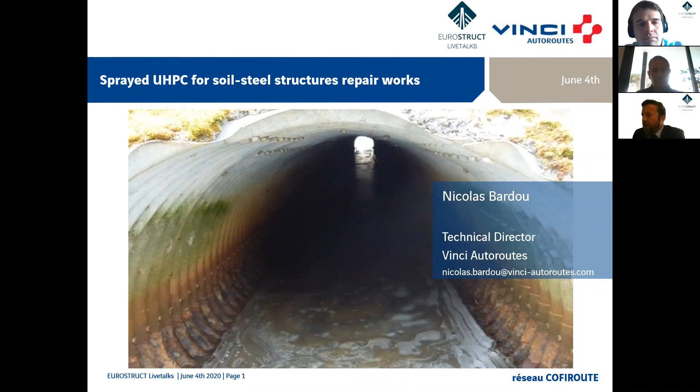I will share with you some recent experiences we have had in Vinci Autoroutes regarding what kind of innovative system we implement in order to solve a really serious problem we face in one kind of bridge we have to deal with, which is the soil-steel structure. Before entering into this subject, I will give you a little introduction regarding France and regarding Vinci.

France has more than 1 million kilometers of roads, including 20,000 kilometers of highways. Half of these highways are granted to private operators, who have financed, designed, built, operated, and maintained the highways network. The first concession contract dates back to the development of the first interurban highways in France, in the late 50s, early 60s.

Vinci Autoroutes is the leading European motorway concessionaire, operating half of the French concession network, more than 4,400 kilometers of motorways. As such, Vinci Autoroutes manages over 6,000 motorway bridges, including nearly 250 viaducts.

Vinci Autoroutes operates through 3 main companies, as you can see on this map. The biggest one is ASF in the south. In the Riviera, there is Escota, and Cofiroute operates the network near Paris.

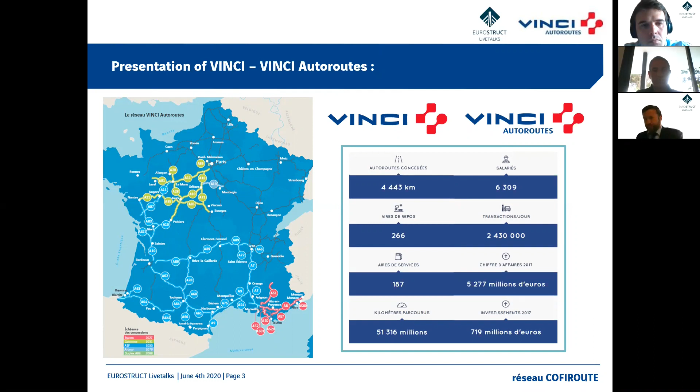Regarding this first context I explained, and to cope with the urgent need for new infrastructures in France, many innovative techniques have been implemented on the French national road network, with the search for economic optimization and speed of design and construction in the background.

And this is how the steel culvert was born. But what is a steel culvert? This is a steel culvert. It's a composite structure consisting of a flexible metal structure made of corrugated steel, assembled by bolting, which is embedded in a compacted embankment. It can be used as a hydraulic structure in drainage systems to restore waterways, or as a dry structure to restore roads or agricultural traffic on fauna paths.

Culverts are recognized as bridges for diameters exceeding 2 meters according to French standard, and some of them have an opening greater than 6 meters. Their use became widespread because this type of structure was simple, quick, and inexpensive to build, while offering longitudinal flexibility to tolerate profile misalignment and having a good ability to carry large loads, which is really important. These structures flourished in France from the 70s to the middle of the 80s.

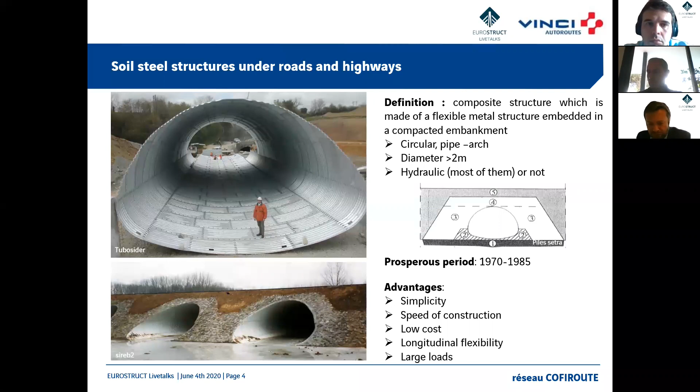But this heritage is confronting serious problems. Steel culverts were generally located in unfavorable environments with the presence of water or aggressive soils, with the transport of solid elements, which cause degradation of the culvert at the level of its walls, in the tidal area, and of its raft. Corrosion can also be very important on the backfill side, and therefore not detectable during visual inspection. The infiltration of water, loaded with de-icing salt for example, through the embankment from the platform is also a factor accelerating corrosion. Overall, the national heritage of metal culverts is aging.

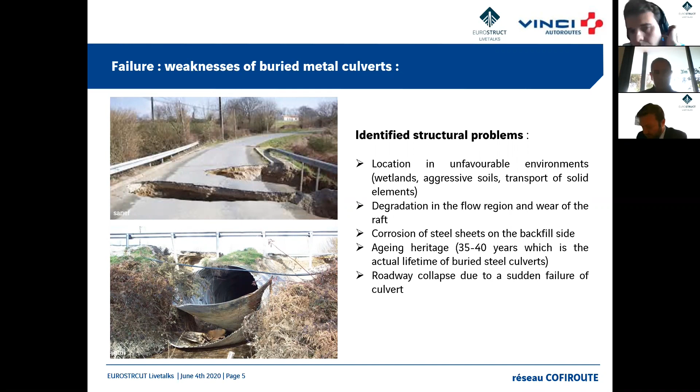Many of them are approaching 35 to 40 years, which is their actual lifetime according to a survey of managers of the national road networks. For example, some manufacturer catalogs expect 25 years as a lifetime for this kind of bridge. Steel culverts are part of the sensitive bridge families, identified as having a risk of sudden failure given their design and their size.

At the French national level, we estimate about 3,000 buried steel culverts, and one third of them are in the Vinci Autoroute network.

So now I will give you some information regarding the way that Cofiroute deals with this kind of problem. We have, for now, a focus on one of the 3 Vinci Autoroute networks, and this is near Paris, with a lot of de-icing salt.

We decided at the end of the 1990s, following an alarming diagnosis, that our program was to complete the total replacement of all structures. In this network we have about 120 culverts. We did a multi-criteria analysis to assess the disorder and prioritize the action. To date, more than 50 culverts have been replaced.

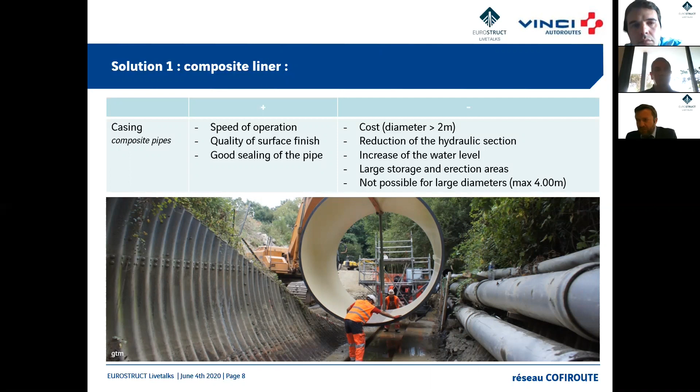The second methodology used in this repair of metal culvert is reinforced concrete. This technique is more mastered and simple to justify by calculation. It can repair culverts of any diameter. The typical wall thickness is 200 millimeters, and therefore it reduces the hydraulic section, but requires less development in the downstream and upstream areas.

However, the on-site works are substantial. Reinforcement, formwork, and concreting works lead to a long planning, often incompatible with the allocated period of intervention. To reduce the duration of work, it's possible to provide more formwork to improve the construction cycle, but these pieces of equipment are very expensive and difficult to amortize on relatively short culvert lengths. On average, our culverts are a few tens of meters in length. At last, the management of risk associated with flooding events is very random.

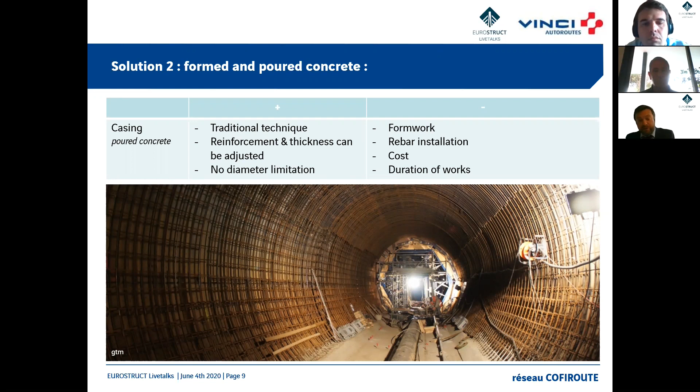The third repair method, classic repair method, is the implementation of dry shotcrete. This technique offers the advantage that it does not require the use of formworks and can accommodate local deformation at the culvert, in particular the inverted profile. However, it requires the installation of reinforcement beforehand and generates a large volume of waste due to rebound of aggregate against the steel sheet, up to more than 50% loss. That material must be disposed of in landfills, which is also a cost, and the work has a significant environmental impact. You can imagine this kind of work in a hydraulic section.

So a new solution appeared really recently, less than 1 year ago. This is the UHPC, the sprayed UHPC. This new solution had been developed very recently in France by two French companies, Lafarge and Freyssinet, which is one of the Vinci companies. This is extending the family of cast UHPC, with exceptional strength and durability. The innovation lies in the high thixotropy of the material.

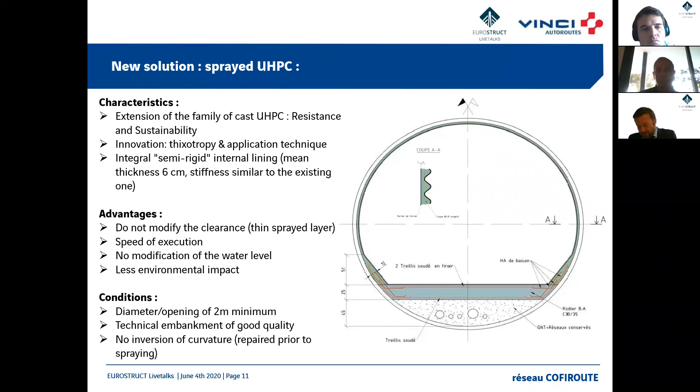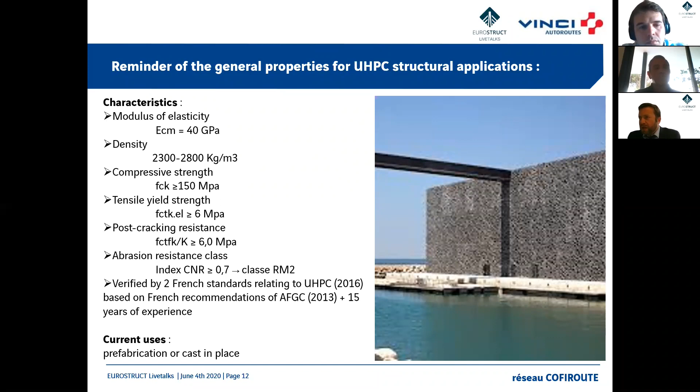So I made this presentation not regarding UHPC itself, but the idea of this innovation was to fit all the UHPC structural characteristics. I don't know if this presentation will be available on EUROSTRUCT, but you can have the reminder of the main properties of UHPC.

So what is the concept of this innovation? The main innovation is based on the thixotropic behavior of the sprayed UHPC, but also on the implementation process: mixing, pumping, and spraying. On the one hand, the rheology has been engineered so that the layer of UHPC does not sag when sprayed on the wall. No stiffening admixture is needed, which makes the solution robust.

On the other hand, specific equipment has been developed to mix, pump, and spray this highly thixotropic material, whose mechanical properties are enhanced by the spraying process, in particular the compression strength. There is low air content. The concept is to reinforce works mechanically as a composite, using the interaction between the soil and the UHPC structure. This is not, as in the traditional technique, a replacement. We take advantage of the soil structure solution.

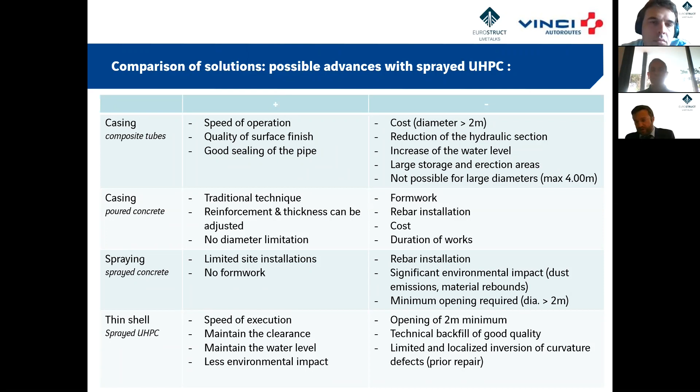So the development of this process followed the following path. The first path, it was necessary to work on the formulation of the material: rheology, adhesion, mechanical performances, as well as the development of the specific method of equipment for mixing, pumping, and spraying the material, while controlling the fiber orientation and the percentage of loss. That was maybe the main challenge.

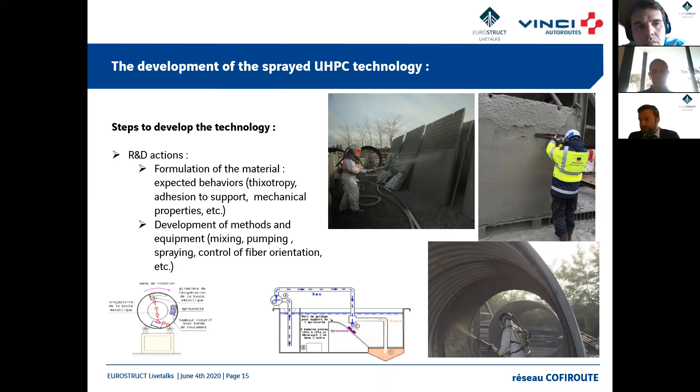The second path was laboratory tests to characterize the material according to the French standard for cast UHPC: compression, density, strength. I guess there is people in the audience from the Université Gustave Eiffel, it was IFSTTAR, this French National Laboratory, that accompanied this process of design. The purpose was to confirm that the material can be classified as a UHPC for structural application.

The third part was the numerical models. Three numerical models were developed in order to perform calculations according to Eurocodes. The first model was a simplified approach for pre-design, the second was a linear approach, and the third one was a non-linear approach with soil springs and explicit soil modeling.

The following path was that the modeling had to be validated by full-scale tests. A new steel pipe reinforced with sprayed UHPC had been loaded to failure. At last the technology was implemented on an experimental structure, a dry culvert of about 20 meters length was applied.

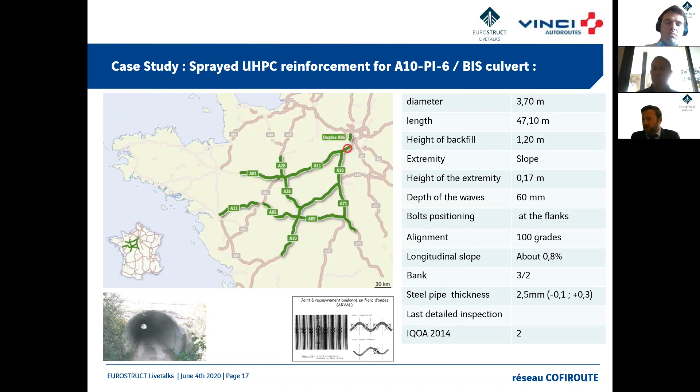So the main steps of this process were, first, the site investigation and studies. The soil investigation was really important for this concept, and all the calculations were also really important. We can verify all the calculation hypotheses regarding the soil investigation results.

The second step was the works: casting of the raft in reinforced concrete with a flat surface for the traffic, cleaning and preparation of the surface by light abrasive blasting, and construction of the UHPC shell with the production of 6 rings a day.

And all this work was controlled by my services, and we also gave a mission to a French national agency to help us lead this process. We also decided to monitor the deformation of this bridge for 10 years.

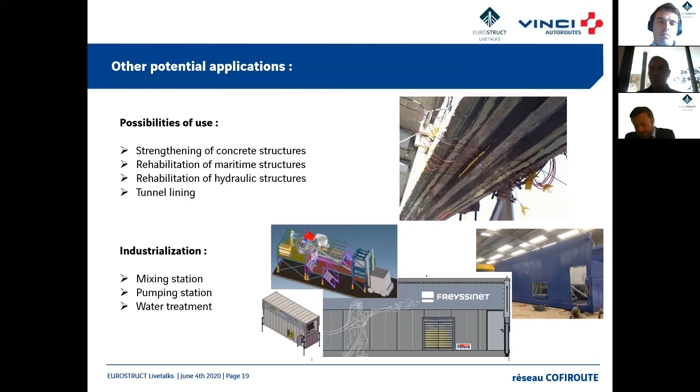Regarding the process, it's really possible to have a more industrialized process than what we applied in our bridge. And I know that the Freyssinet-Ductal team is implementing a very good automatization, with an 80% automated operation. A mixing station and pumping station for the water treatment would be completely automatic.

The challenge is steady production and pumping in order to have a continuous spraying. So to conclude my presentation, I can say that for us, and maybe in 30 years, we have the problem of this metal culvert bridges due to corrosion.

We implement a lot of solutions, but regarding the really strong constraints on environmental issues, the thin shell sprayed UHPC could be a really good solution for us. And we can also imagine the extrapolation of this solution for other repair and maintenance engines.

So I finish my presentation. I'm sorry for my English, which is not as good as I would like, but I guess it will be enough to be understood, and I am available to answer your questions.

Thank you, Nicholas. It was a very interesting presentation, dealing with a very relevant point and fact that I imagine is not only at Vinci. I imagine that many other concessionaires and road operators are facing this issue nowadays.

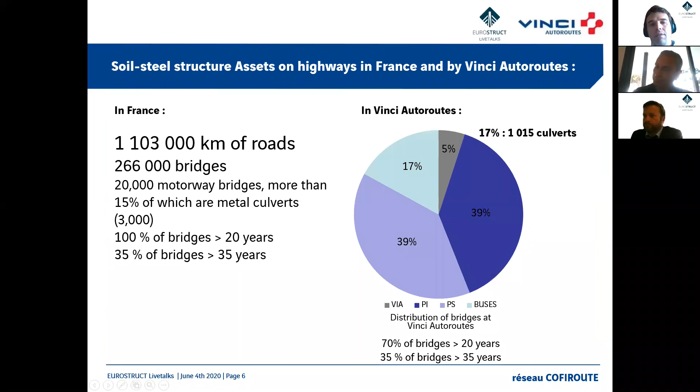Yes. According to the French standard and the way we have to deal with our bridge management, we follow all our bridges with really strong inspection campaigns. We have, for example, each year a summary inspection of our bridges, and a complete inspection every 5 years by engineers. For the most critical structures, we have more than visual inspections.

We also measure, for example, the thickness of the steel. In these structures, each year, we measure the thickness of the steels. And mixing the observation of corrosion that we do with visual inspection with the results of the corrosion sizing we do each year, we are able to produce this kind of analysis.

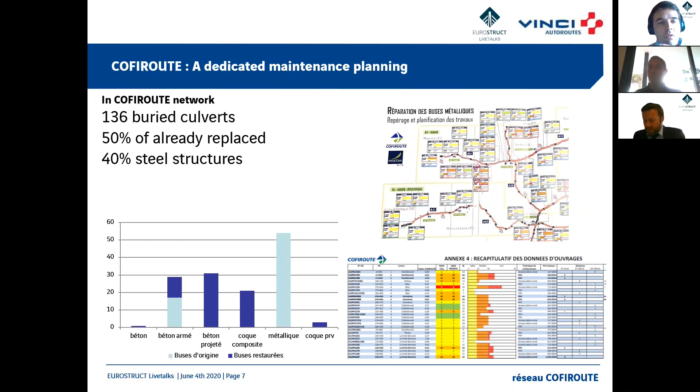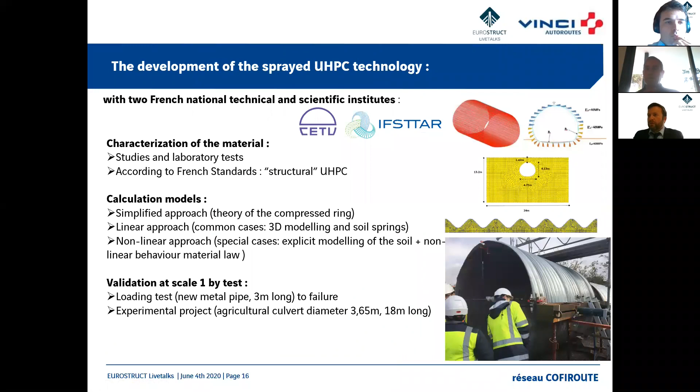The preparation is relatively simple. We have to... let me give you the presentation. It's basically simple. The preparation of the steel is only a light abrasive blasting to help the adhesion of the concrete, the UHPC, on the steel.

In some situations, we also have to put some steel networks to help at the most vertical places. In the picture, for example, you have the experience we did on the Cofiroute network, where in some places they put some steel networks. It was not for structural behavior, it was only to help the adhesion of the concrete on the culverts. I guess that by now they work on the concrete formulation in order for it not to be necessary to put this kind of network.

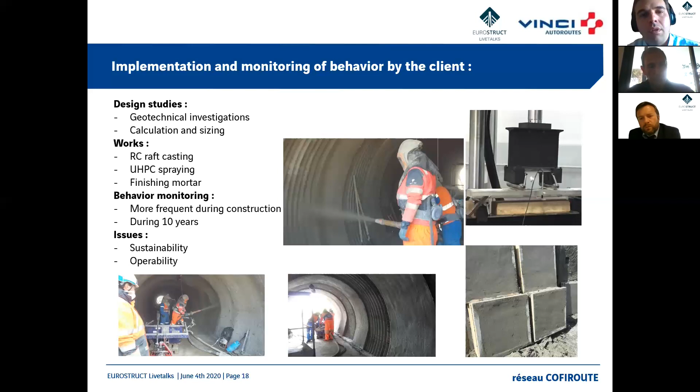Another question, Nico: the process you spoke about, is it a wet mix or dry mix sprayed concrete, and what components are mixed before spraying? You spoke about that previously regarding the traditional technique.

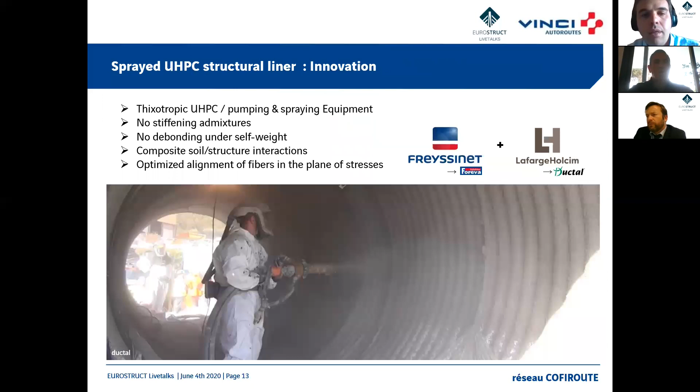Yeah, the spraying process of the concrete is a dry spraying process. In this situation, it's a relatively traditional composition of concrete with a limited granulate size, but you don't have fibers in this case, because in this situation you have to put your steel before spraying the concrete. I don't know exactly what the special adjuvants are that give the good rheology, but there is no fiber addition in this situation.

Okay, Joan. Well, I don't have more questions in the chat, so I'd like to put my own question: after this experience, after all these years of using this system and all the problems related to corrosion, damage, and the cost to repair these damaged culverts, do you think that for new culverts this is still a good solution, or would it be better to use the traditional way of concrete, either in situ or precast?